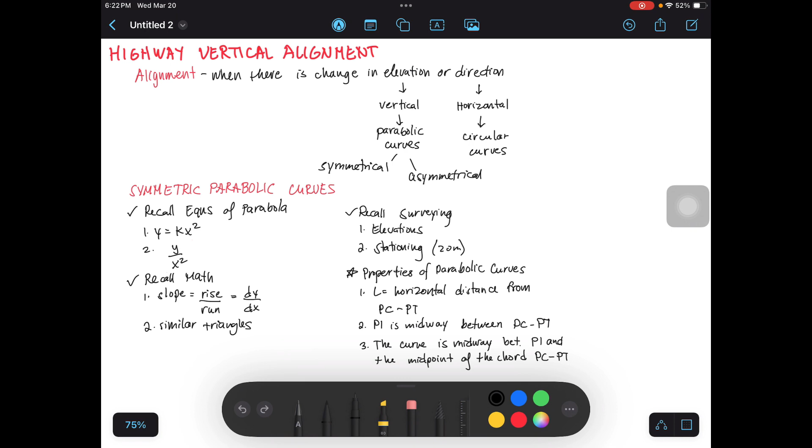So last time we discussed sight distances. When do we use sight distances? When there's an obstruction. So when there's an obstruction, we need to design the highway or roads for safe sight distances so vehicles don't collide, or in case there's an object along the way.

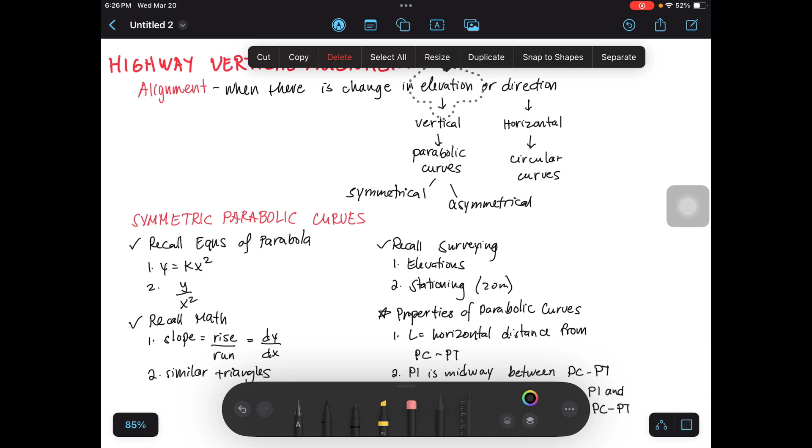Now next in geometric design for highways is alignment. We design alignment in highways when there is a change in elevation or in direction. When elevation changes, it's called vertical alignment. When direction changes, it's called horizontal alignment. So what is vertical alignment? How does a change in elevation happen?

For example, you have a straight road, and then a vehicle. What if it needs to go up and reach the upper part of the road? Then you have a change in elevation, so this needs vertical alignment. For vertical alignment, we use parabolic curves.

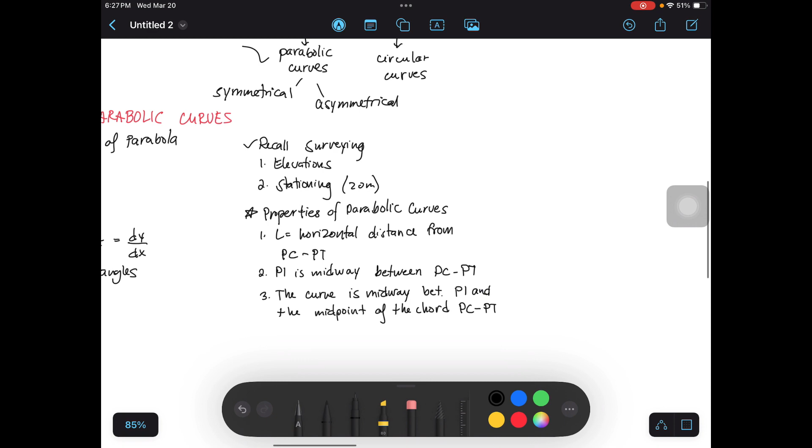For horizontal alignment, we use circular curves. We smoothen the corners using circular curves. This topic, horizontal alignment, was already discussed before in our surveying subject, right? That's where we had simple curves, compound curves, and reversed curves. Those are horizontal alignment, where you have a radius. So that's horizontal alignment, and the curve there is circular.

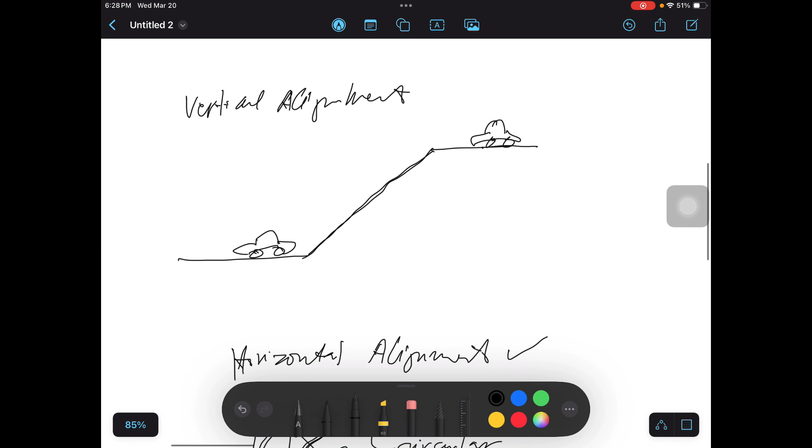So in highway engineering, we will discuss vertical alignment. How do we design vertical alignment? We use parabolic curves. This means these corners here, we smoothen them with the use of a parabola, the parabolic curves. Let's use a red pen to show this, we smoothen them using parabolic curves.

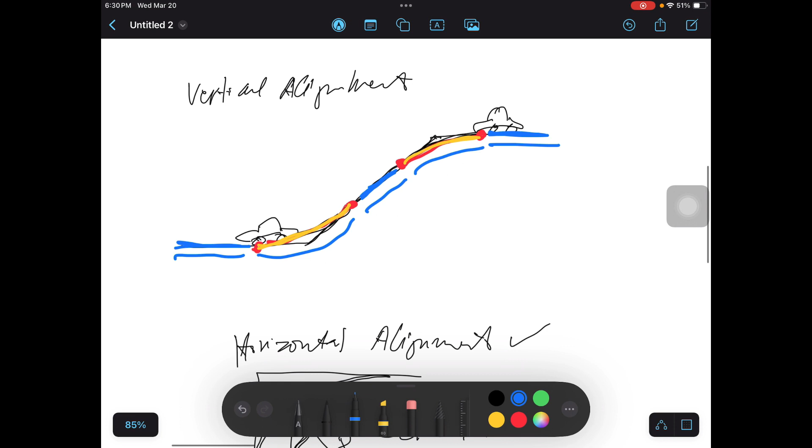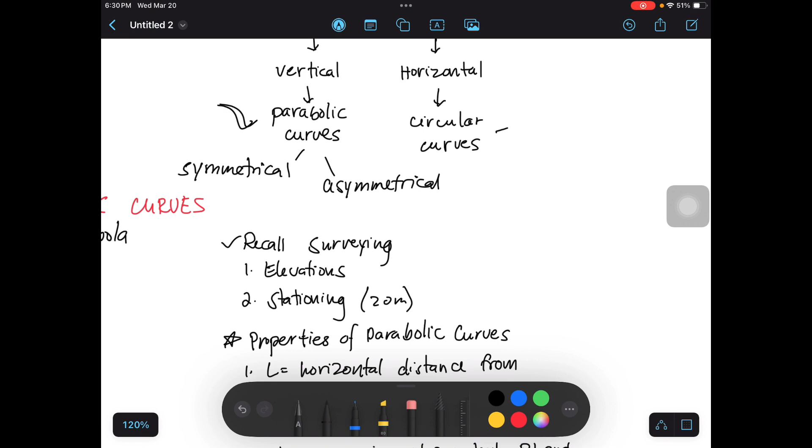So for vertical alignment, we use parabolic curves, and among parabolic curves we have symmetrical curves, and another type called asymmetrical curves. Symmetrical curves are symmetric, while asymmetrical curves are not symmetrical. So let's discuss first the symmetric parabolic curves.

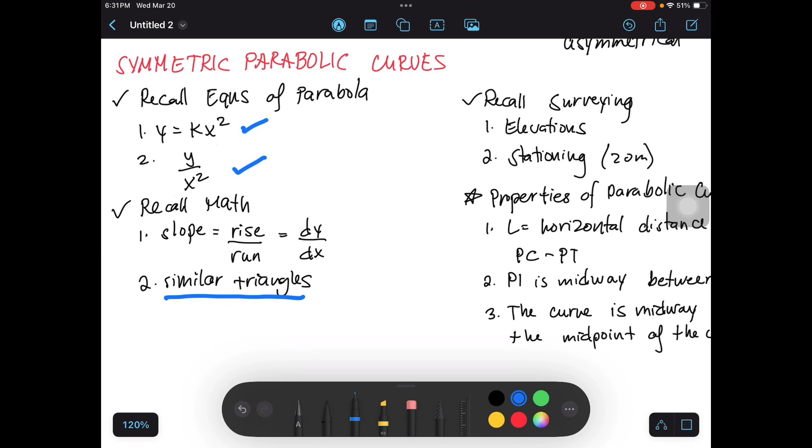So we need to recall our past lessons on parabola equations. Equation 1, this one, and then the relationship of the vertical and horizontal dimensions of the parabola. Recall also that in math, slope is equal to rise over run, and in calculus, slope is defined as dy over dx. And in geometry, we will use the principle of similar triangles. Then in surveying, recall the elevations and stationing. Typically, per station is 20 meters.

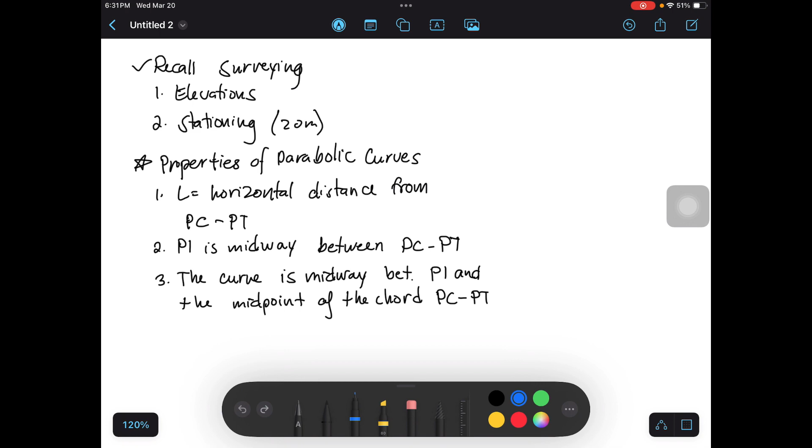So let's have an example of a parabolic curve on a road. At the start, of course, there is a designed terrain. Say the terrain is like this. This is the terrain that you want to smoothen for travel. So we will use a parabola.

We already discussed passing sight distance, when the terrain has a slope, meaning it has a grade. This one is upward, so it is a positive grade. This one is downward, so you have a negative grade. Let's say you have G1 here, and G2 here. G2 is negative because it's downward, G1 is positive because it's upward. This is called the backward tangent, and this is the forward tangent.

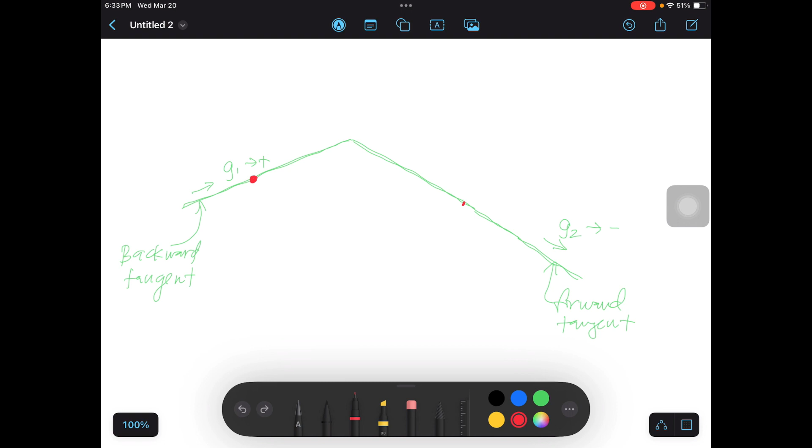Now let's smoothen using a parabola. So let's draw a parabola here. If your parabola starts here, it ends here. So this is your parabola.

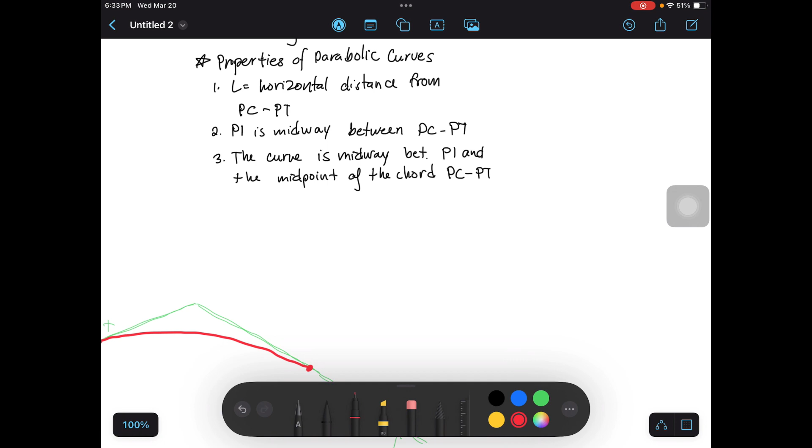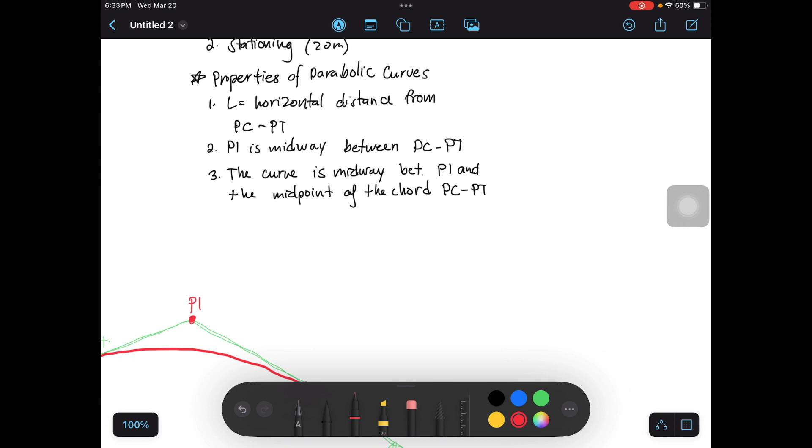Now we can use these properties of parabolic curves to identify the items or parameters involved in solving parabolic curves. Number 1: L is equal to the horizontal distance from PC to PT. So what is PC and PT? These points, PC, wait. So this is PC, and this is PT, start and end. Then there is another intersection here, we call this PI. So property 1, L is equal to the horizontal distance from PC to PT.

So when you dimension the length of the curve, it is a horizontal distance from PC to PT. So this is your L. The length will not align with the actual curve from PC to PT, it won't align like that.

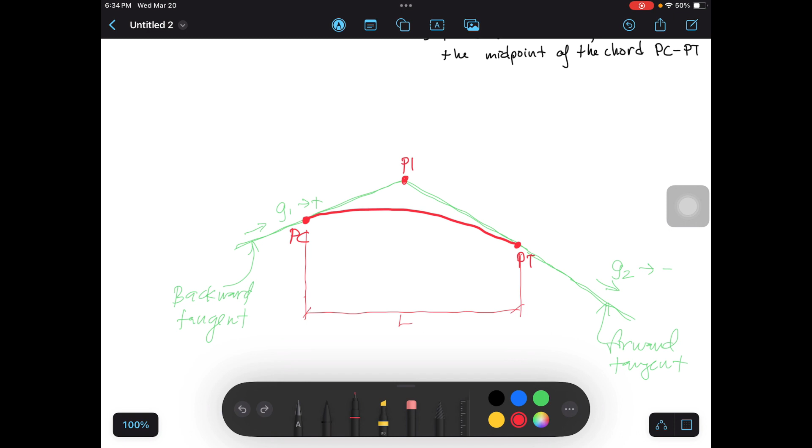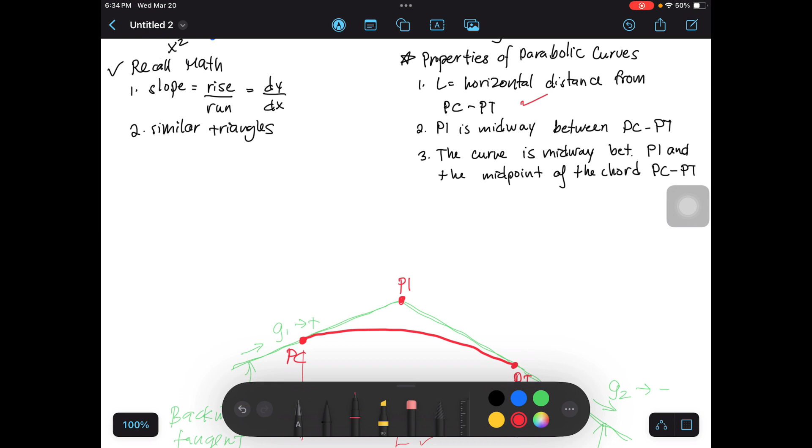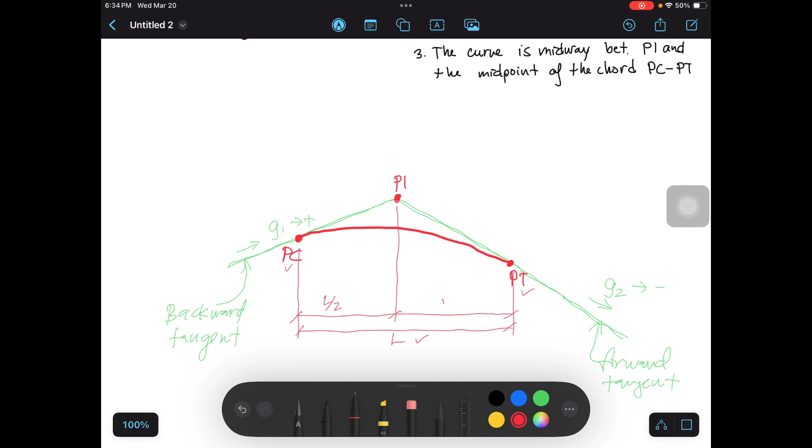The length of the curve is aligned to the horizontal. So property number 2: PI is midway between PC and PT. So this is PC, this is PT. For PI, if you bring it down and dimension it like this, it is midway between the two, meaning this is L over 2, and this is also L over 2. That's the second property.

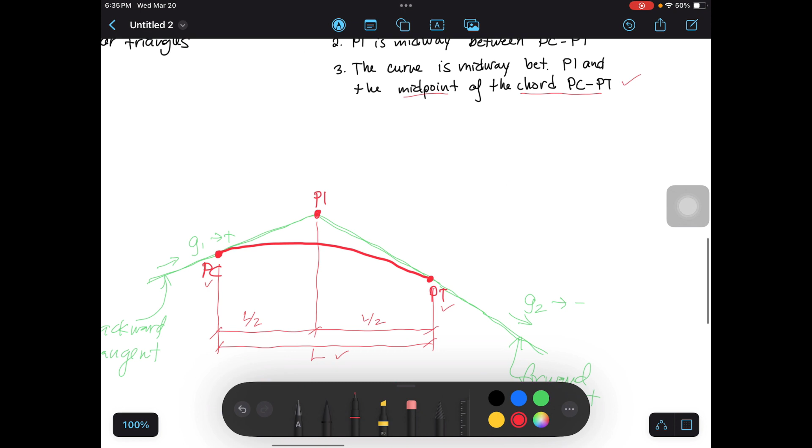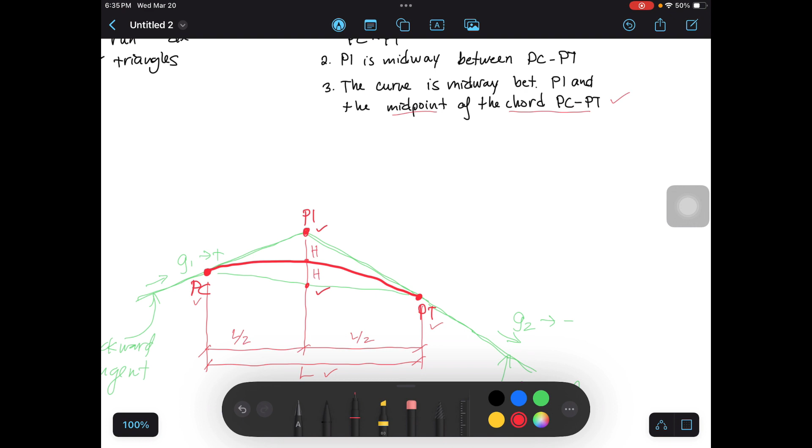Third property: the curve is midway between PI and the midpoint of the chord from PC to PT. So we form a chord from PC to PT. This is the chord, and this is the midpoint of the chord. That midpoint is midway between PI and here. So they're equal, meaning this dimension is equal to this dimension. They are equal.

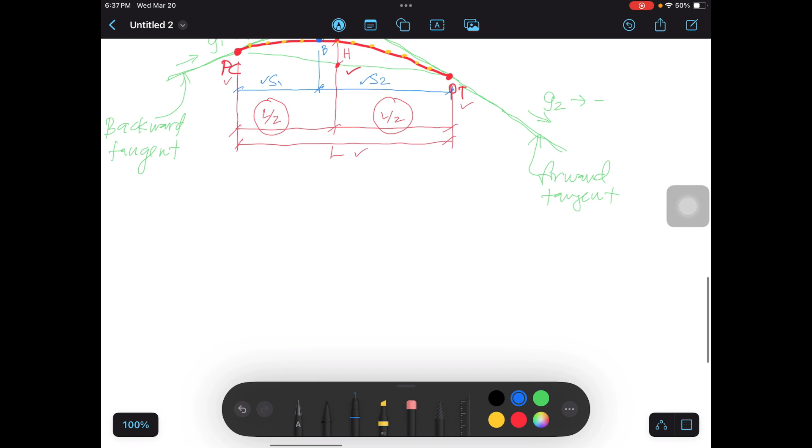If it's horizontally measured from PC, we call it S1. From PT, we call it S2. Now let's try to solve and formulate. Let's make a formula. Let's derive the formula on how to get S1, using our basic math, which is this one, and of course, surveying. So S1, let's first solve for S1.

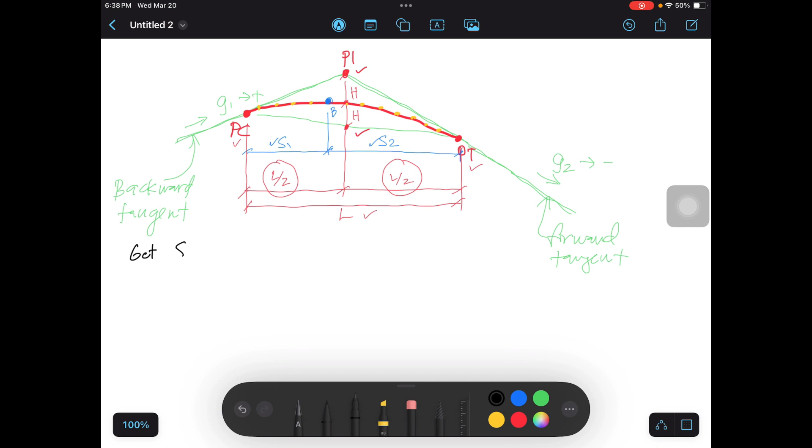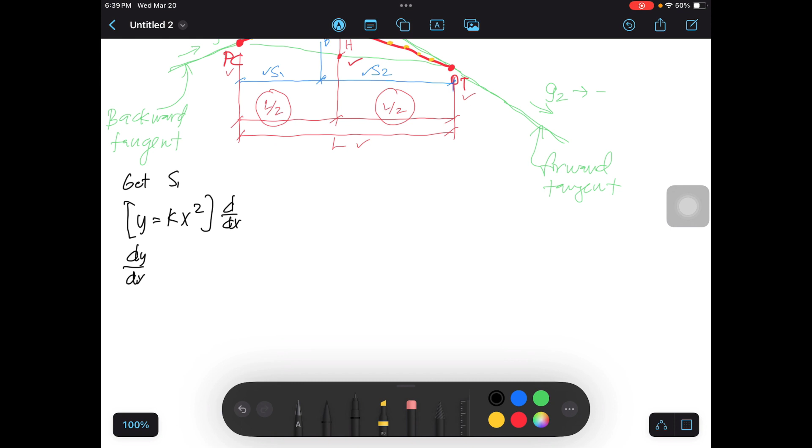Since parabola tayo, let's use yung equation ng parabola, which is y equals kx squared. So kapag dinerive natin to, d over dx, this will be dy over dx equal to k times 2x. Recall, dy over dx is slope, diba, sa calculus, and slope for a parabolic curve is yung grade.

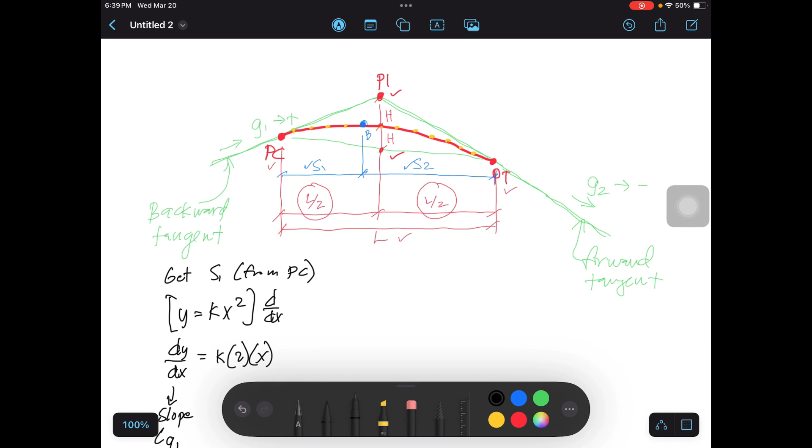Since from PC tayo, S1 is from PC, ang grade na gagamitin is grade 1. Let's substitute. G1 is equal to 2kx. And then, what is x? Siya yung horizontal distance ng highest point to PC, which is S1. So let's substitute siya dito, note this as S1 na. Ayan, meron na tayong equation with the relationship ng G1 and S1.

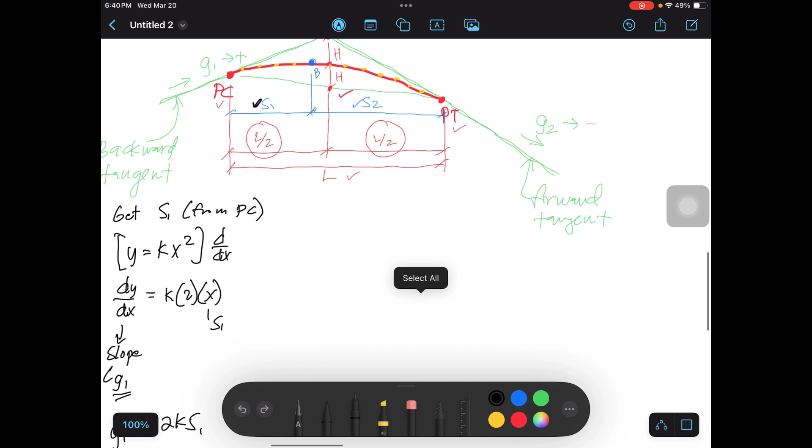Kaso, ano yung K? Wala naman tayong K. So let's derive an equation to get K. Let's use yung S2, let's get yung S2.

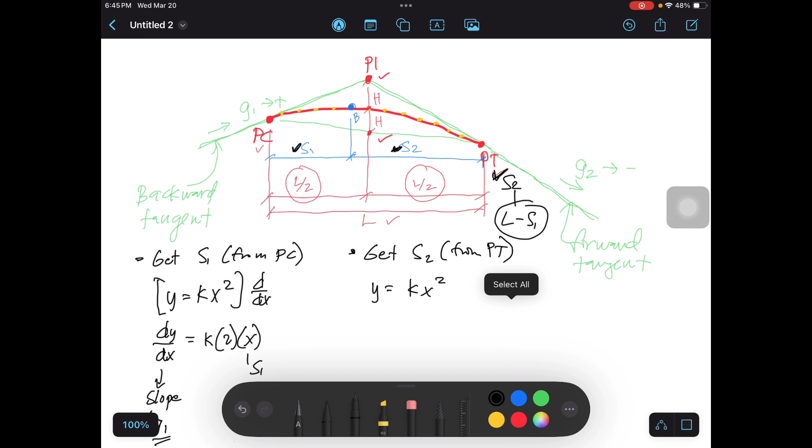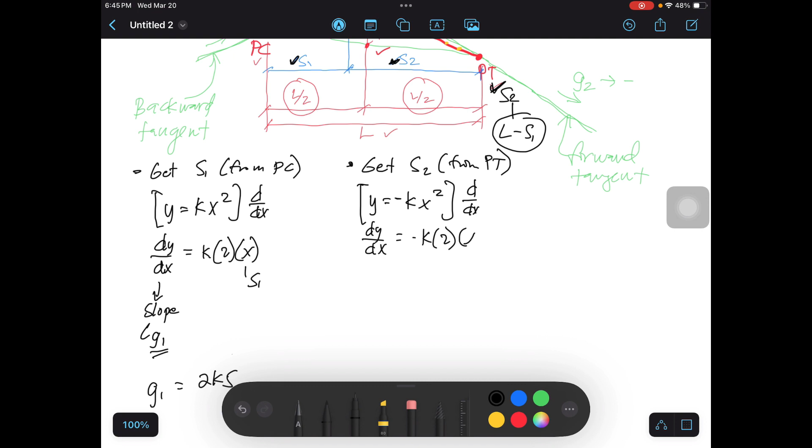Yung equation ng parabola ulit, kx squared. Pero since nandito tayo sa side ng S2 or side ng PT, negative tayo dyan since downward ang grade natin. Let's derive d over dx. So meron tayong dy over dx equals negative k2x. Remember again, this is a slope. Since nasa side tayo ng PT, ang grade doon is G2. So let's write, this will be G2 then. And sa right side ng equation, ay ito pa ng x.

Ano ang x natin sa side ng PT? It is S2, this is S2. So let's write yung second equation natin. This will be G2 equals negative 2K S2. So meron na tayong equation, another equation.

So we are doing this para makancel yung K. Let's find a way to cancel K. What we can do is divide natin yung dalawang equations. Cancel yung K. Divide mo sila, cancel itong dalawa. Ang natitira is G1 over G2 equals negative S1 over S2. So G1, G2 are given.

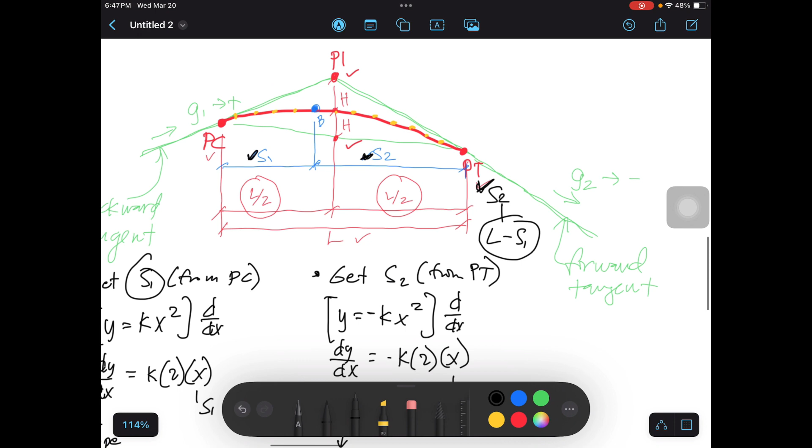S1 is, may nakuha na tayong S1. Pero as you can see, dalawa yung variable natin, S1 and S2. So since we're deriving, muna let's express S2 in terms of anong pwede nating gawing equation for S2. Diba kapag yung length, may minus natin ng S1, this will be S2.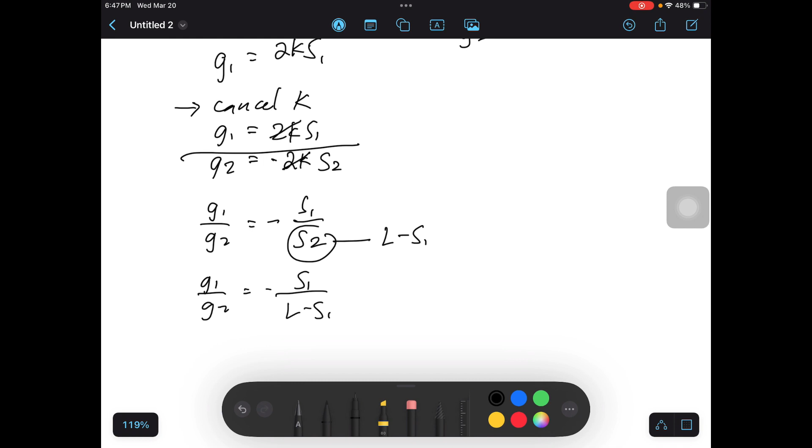So let's substitute this value. Instead of S2, let's use L minus S1. So our equation will be negative S1 over L minus S1. Isa na lang yung variable natin sa equation, it's S1 na lang. And this one, we need to isolate para ma-form natin yung equation for S1 lang. So what we can do, cross multiplication, G1 times L minus S1 equals, dito yung negative, and then S1.

Okay, distribute natin to. G1 L minus G1 S1 equals negative G2 S1. Isolate natin si S1, ilipat natin doon. So this will be positive na. So G1 S1 minus G2 S1 equals G1 L. Isolate na natin yung S1 na to. Bring out natin, so G1 minus G2 equals G1 L.

So ma-isolate na natin ang S1 by dividing both sides, so G1 minus G2. Cancel to, we got our equation for S1.

At let's get yung equation for S2. Pwede na lang natin gamitin yung mga equation na to at equation na to. So let's manipulate equation 2 para i-isolate si K, para yung K na yun, isi-substitute natin sa K na to. Let's do that from equation 2, we will get yung value ng K. Let's isolate K, nagiging siyang ganyan.

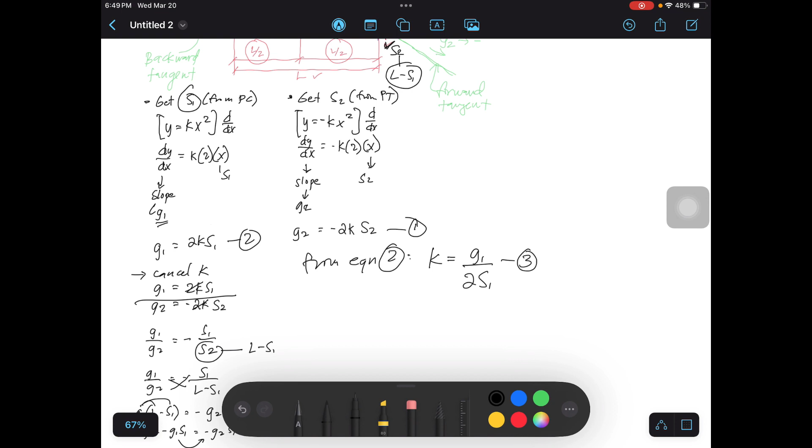So let's call din equation 3. Ilipat natin yan sa equation 1, put equation 3 in equation 1. So equation 1 is G2 equals negative 2. Then ano yung K? Gagawin na natin siyang equal sa equation 3 na 2S1, S2, KS2.

So ito na yung equation natin, but dalawa yung variables. Since this is to get S2, yung S1 ang express natin in terms of S2 by using L minus S2 is S1. Let's substitute that, negative. Pwede na natin i-cancel pala itong 2, ay sorry, alisin na natin ito dito. So the answer is negative G1 over L minus S2 times S2.

Hindi naman pwedeng i-ganyan yan dahil quantity ito, hindi mo yan maka-cancel. So what we can do with this, cross multiplication again. So G2 times L minus S2 equals negative G1 S2. Distribute, G2 L minus G2 S2 equals negative G1 S2. So put together yung similar, or put together yung S2.

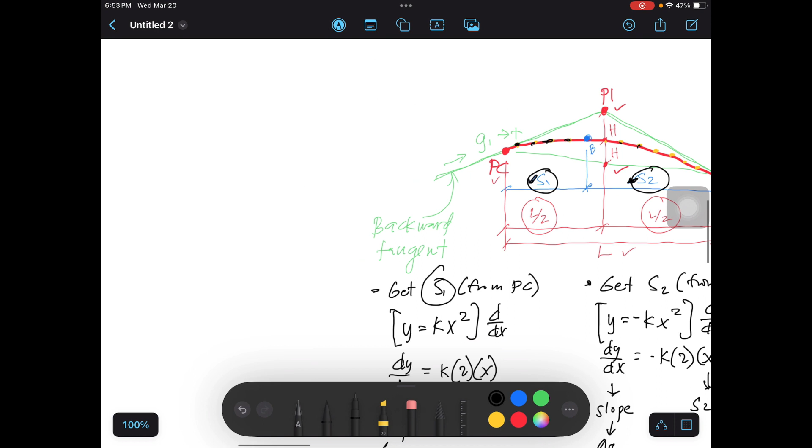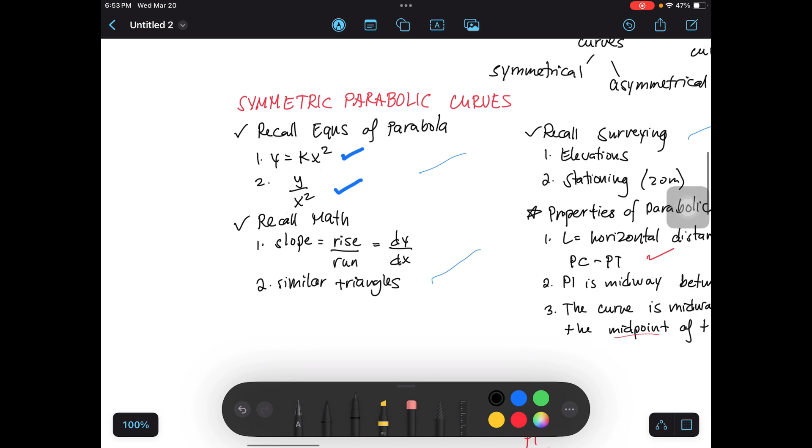So, we can use this relationship, the equation says that the vertical dimension from the point being observed up to the tangent is y. This is y. And the horizontal distance of y from the reference point is x. So when you relate them, their proportion is y over x squared.

So you can use this proportion for other points of the curve. For example, take h. The proportion applies to h too. So h over L over 2, squared.

Why is it like that? Because for a point along the curve, this is its y, and this is its x. For h, the midpoint of the curve is here, up to the tangent is h. The horizontal distance from the reference PC is L over 2. That's why this is y, and this is the corresponding x squared for h. I hope you understood that.

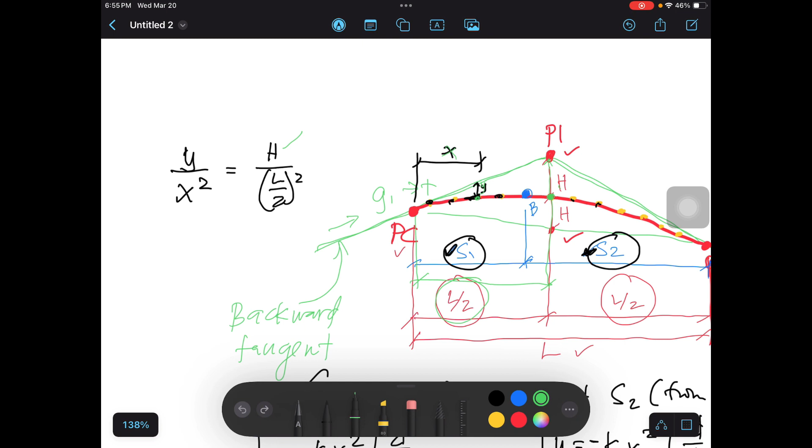So using this equation, we will be able to get the position of all points along the curve. So let's say you have another point you're evaluating. Let's call it point 2. Let's say it's here. Here is point 2 that we observe.

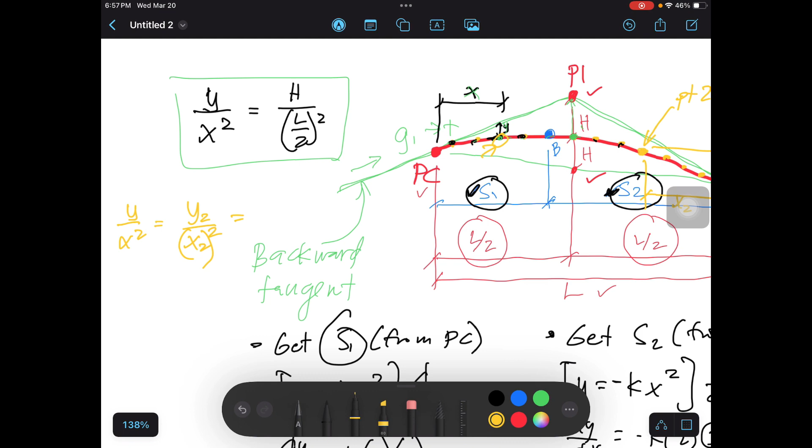It will be y over x squared equals y2 over x2 squared. And that is also equal in proportion to h over L over 2 squared.

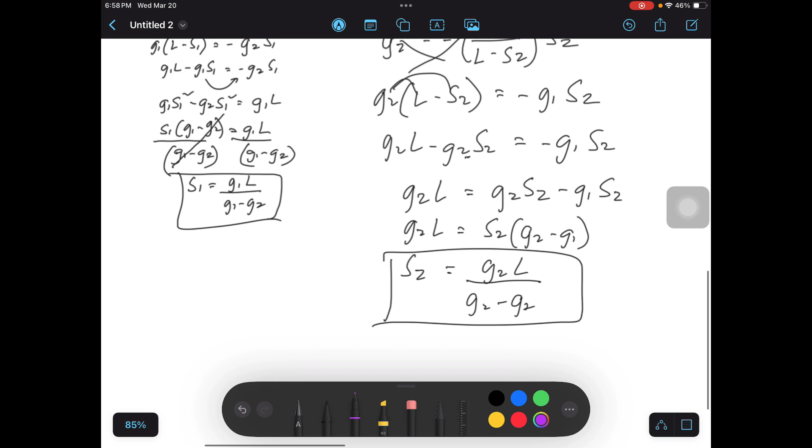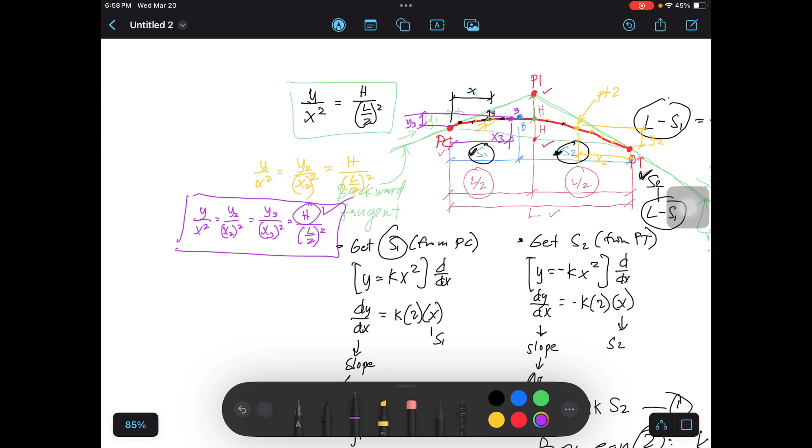So, they just repeat. We've now completed all the equations we need for solving a parabolic curve. We have the formula for S1, S2, and we have a formula for H - oh wait, we don't have H yet. We got the one for X and Y, but we don't have H yet. So we need to derive a formula to define H.

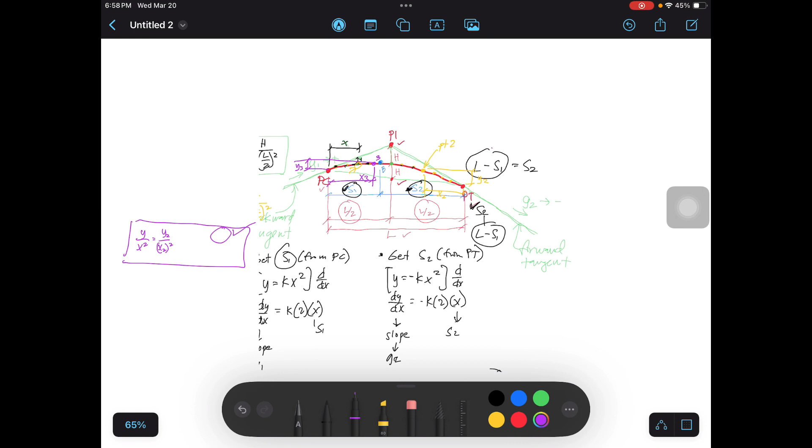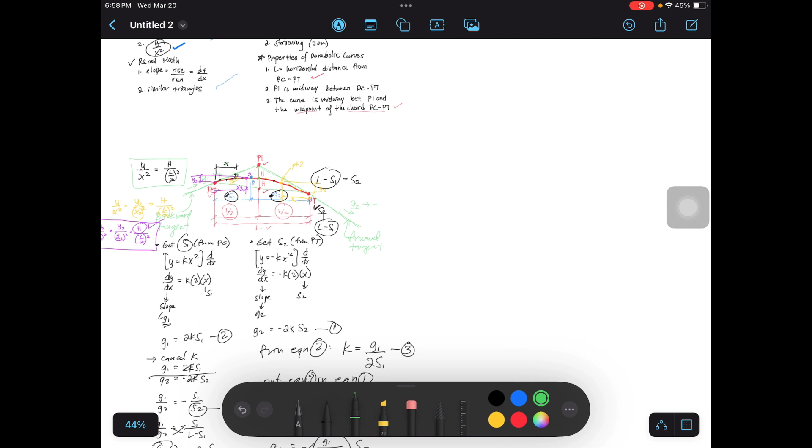Our diagram has gotten a bit messy, so let's try drawing another curve. Let's draw it again here. We will smoothen this using a parabolic curve, starting here, going like this.

Okay, this is like a review. What are the points? Set up the points. We have 3 points: PC, PT, PI. First property of parabolic curves: horizontal distance from PC to PT is L, and from PI the distance to PC and PT sides are equal. Third property is that the midpoint of the chord from PC to PT forms equal dimensions here. So you have H there, equal to H here.

Now we're trying to get the value or formula for H. So let's add the other labels too. This one is G1, this is G2, this is again the back tangent, this is your forward tangent.

What else should we label? We can use that for the fill-in-the-blanks quiz on the parts of the parabolic curve. What else haven't we labeled? I think we've put in everything. So let's put in S1 now.

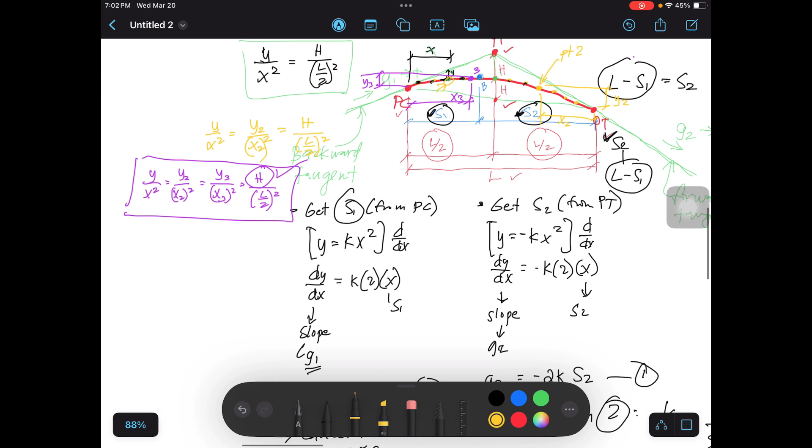What's the property when triangles are similar? They're proportional, similar to the parabolic curve - the x and y in the parabola, y is to x squared. Here it's similar, but the denominator isn't squared.

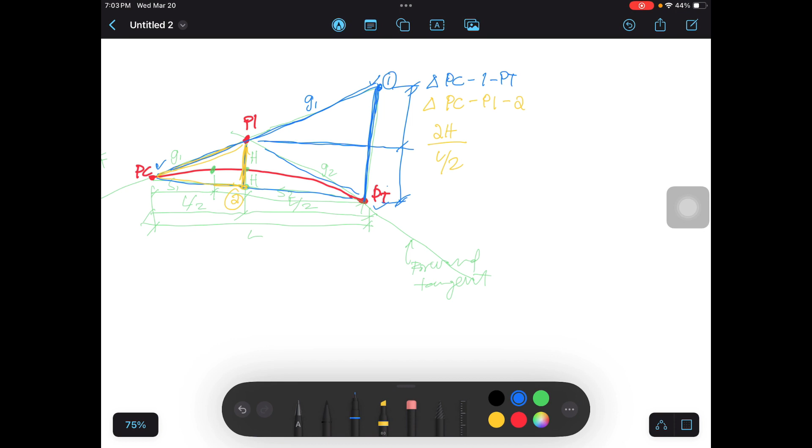So let's use rise over run. This is a continuation for grade G1, and this is still for G2. We can get this by rise over run. This is your rise, this is your run. G1 is equal to rise over run.

So what is your rise? This is the x we're looking for. And what is the run? It's L over 2. So let's get x.

This is our x. And then for the bottom part, to get that, it's G2 now. G2 is equal to rise over run. But remember, G2 is negative.

And what is the rise? That's what we're solving for, let's call it x. So its run is L over 2 as well. So the x for that is negative G2, times L over 2. So let's put G2, negative G2, L over 2.

So if you combine that, it will be the complete height to complete our similar triangles. So what is the equation for similar triangles of the big triangle?

So height is L over 2, G1, G2, and then what is the denominator? It will be the total length L.

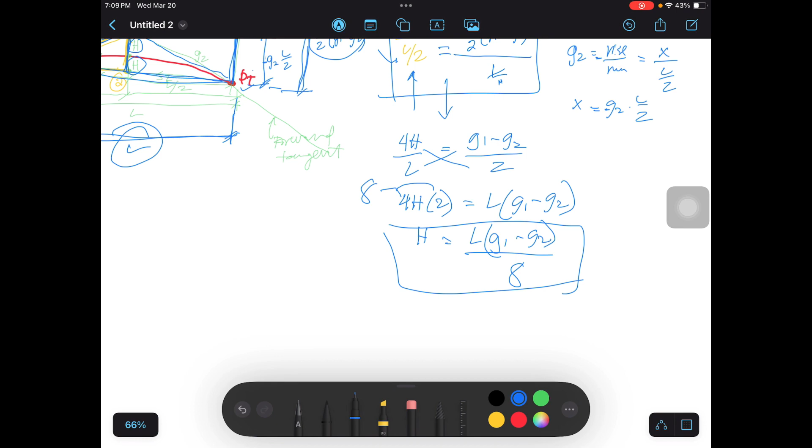So let's have a problem now. Example number 1: a symmetrical parabolic curve. A symmetrical vertical summit curve. So it's given that our curve is symmetrical, and it's vertical, a summit curve.

So number 1: compute the length of the curve. Compute the distance of the highest point of the curve from PC. Compute the elevation of the highest point of the curve.

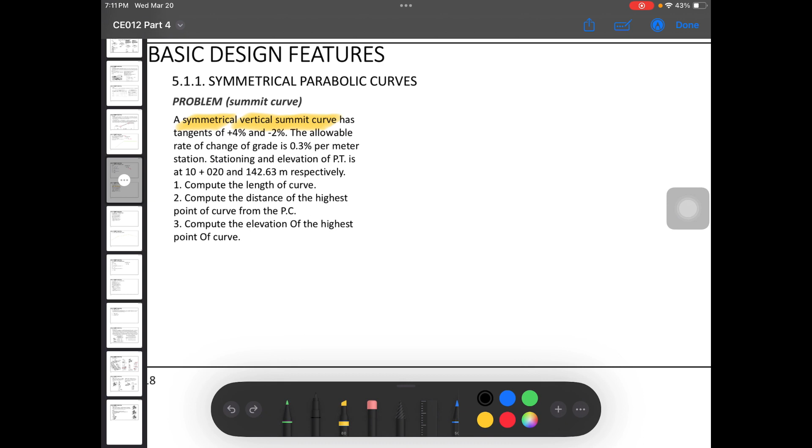So let's identify the given. Number 1, let's get the length of the curve. So how do we get the length of the curve? From the formulas we derived, there's no length of curve formula there.

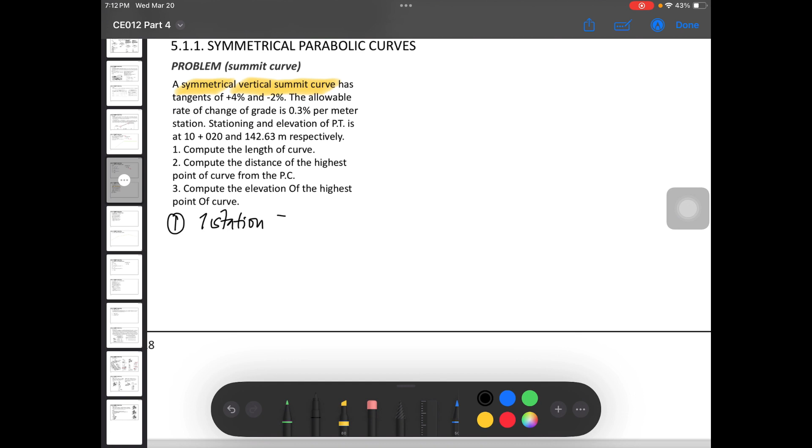But we're given that there's a change of grade of 0.3% per meter station. We stated earlier that per station is equivalent to 20 meters. So every 20 meters, we have a change of grade of 0.3%. So we can put that into an equation: R is equal to G1 minus G2 over N.

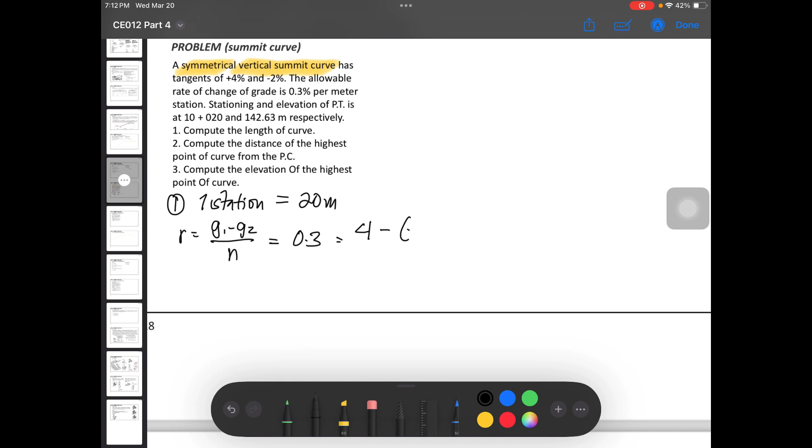So R is the rate of change of grade, and N is the equivalent number of stations. So let's substitute. R is 0.3%, and the grade for G1 is 4%, minus G2 which is negative 2%, all over the number of stations. So we can get the number of stations from this equation.

So performing the operation, we can get N equal to 20 stations. So if we have 20 stations, and each station is 20 meters, the total length of our curve becomes 20 stations times 20 meters. So we get a length of 400 meters. That answers number 1.

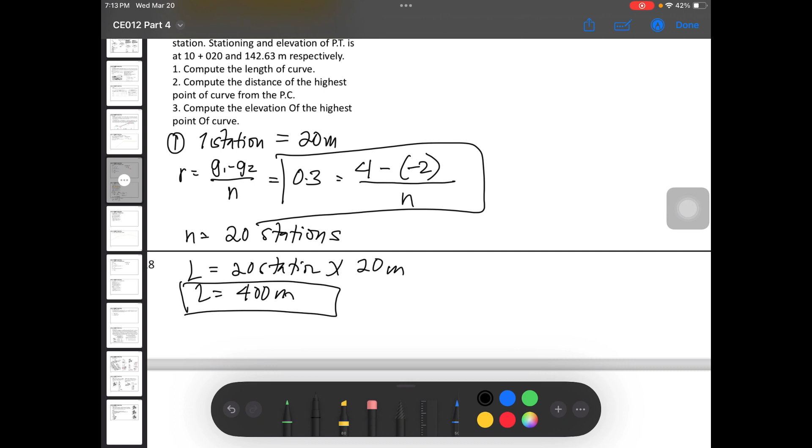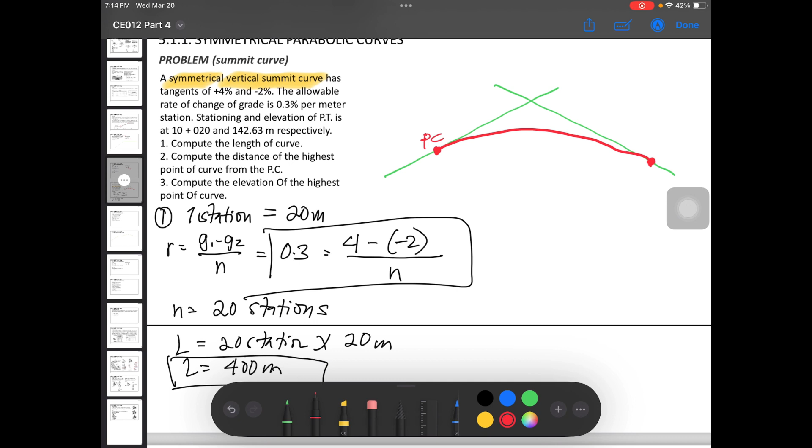Number 2: compute the distance of the highest point of curve from PC. So we need to draw the curve here. Let's start with the back tangent and forward tangent, then label the points: this is PC, PI, and PT.

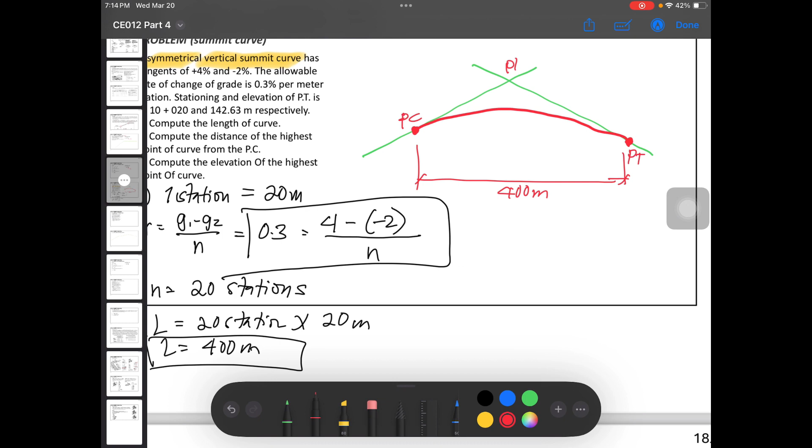And then we got the length of the curve, which is 400 meters. The given station of PT is 10 plus 020, and the given elevation is 142.63 meters. So that's for point PT.

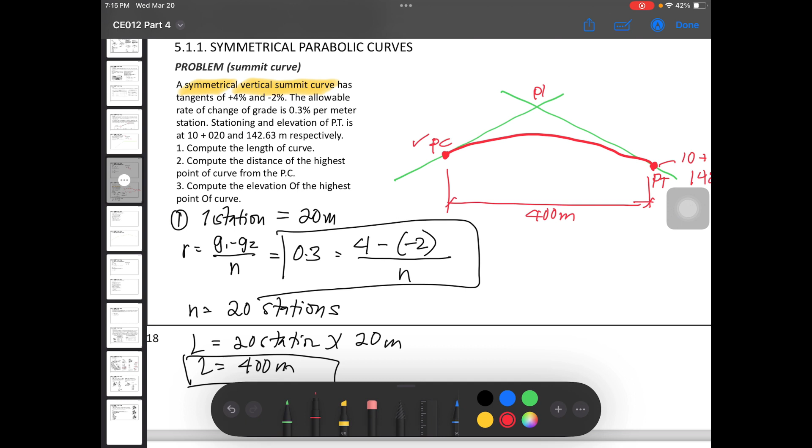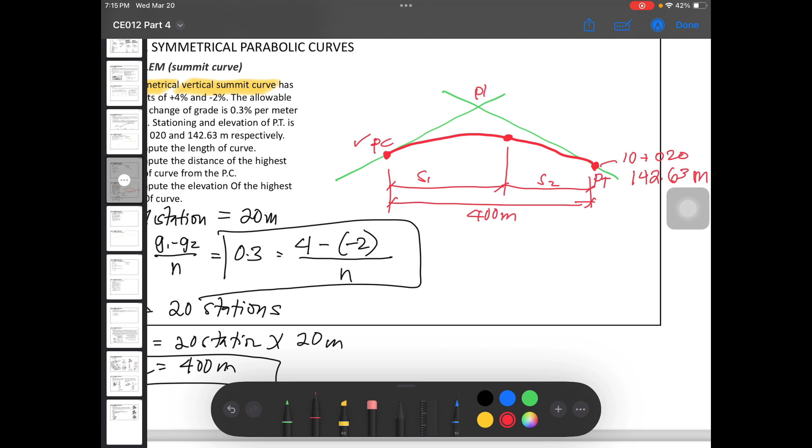Now we'll look for the distance of the highest point of curve from PC. So starting from PC, what is the distance if we go from PC? That will be S1. So let's say here is the summit or the highest point, this is S1, and then this will be S2. Then we have a grade of 4% here, and 2% here on the side of PT. So what is our equation to get S1?

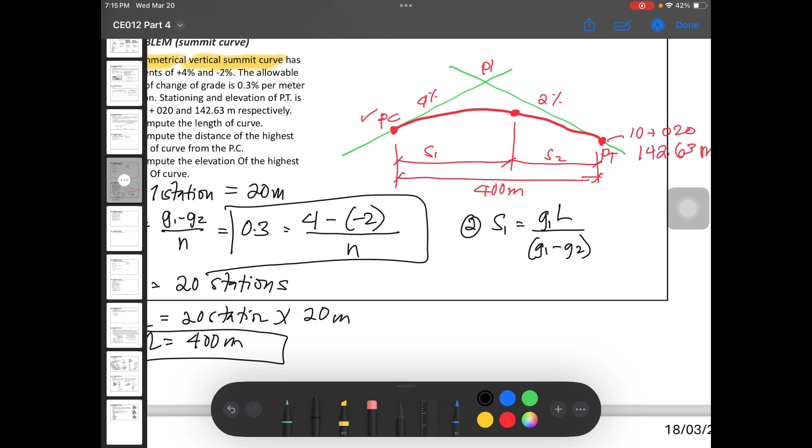G1 times L over quantity G1 minus G2. So substitute, G1 is... so kanina sa number 1, hindi natin kinonvert yung mga percentage values. Ginamit natin sila direkta dito.

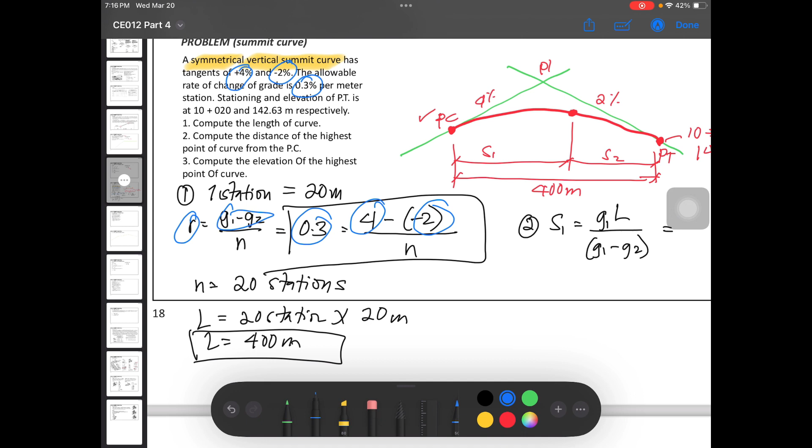Kasi walang unit ang number of stations. Pero dito sa number 2, sa formula may kasama silang linear unit, which is yung length, in meters. Itong S also in meters. So kapag ganon, we need to convert yung mga grades into decimal value nila.

So G1 will be 0.04, L is 400 meters, G1 is 0.04 minus G2 na negative 0.02. So doing the operation, S1 is equal to 266.67 meters from PC.

So ito yung S1, 266.67 meters. So evaluate your answer. S1 is 266.67, ibig sabihin lampas siya dun sa kalahati ng length. So ibig sabihin tama yung assumption natin na lampas siya sa PI, dahil dito yung half ng length, ito yung L over 2.

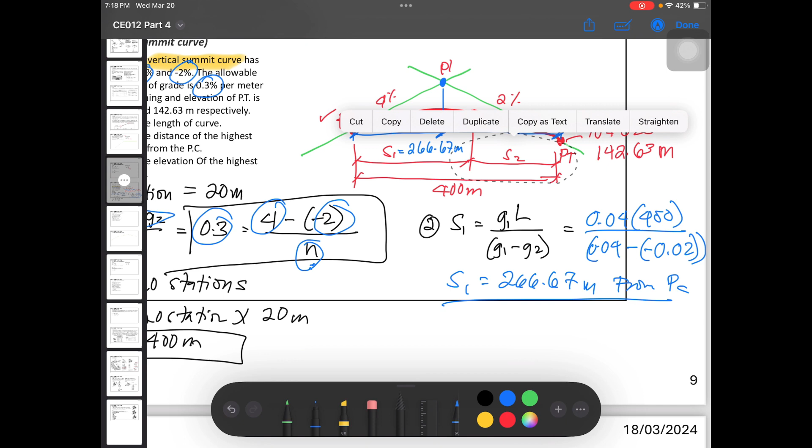Ayun. Saglit. Ay. Saglit, ba tayo lumipat?

So, anong magiging value ng S2? It's 400 minus 266.7. So, that is equal to 133.33 meters.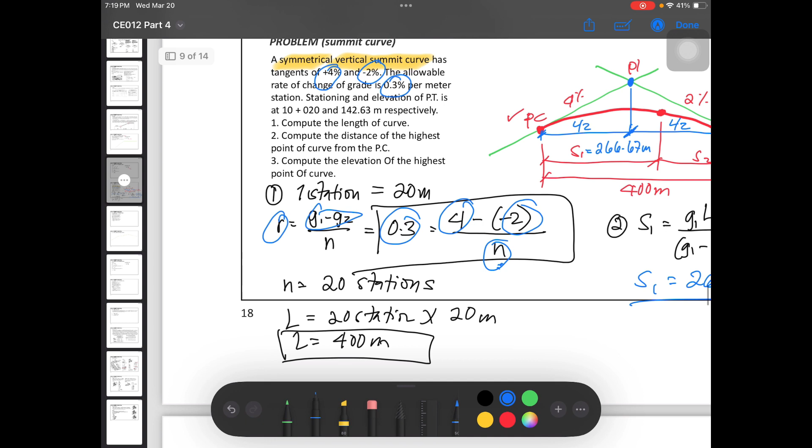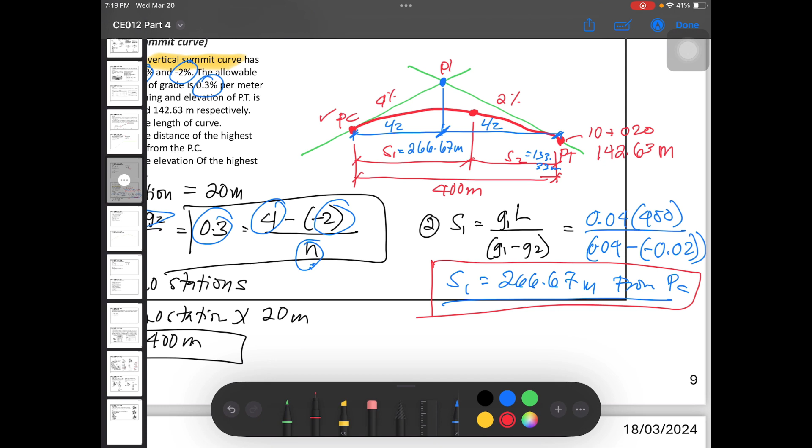Ano nga bang kinukuha natin sa number 2? We're computing for the distance of the highest point of curve from PC. So, that is S1. So, we've answered na pala number 2. So, the distance ng highest point from PC is 266.67 meters.

So, number 3, yung elevation ng highest point of curve. Ano ang need nating dimension para makuha yung highest point ng curve? Since we are given yung elevation ng point PT,

ito siya. This is 142.63 meters. So, we can use yung rise over run. Slope is equal to rise over run. Makukuha natin itong height na to.

Height over run ng grade -2, grade ng forward tangent versus yung S2. So, makukuha mo yung height na to. And then, pag nakuha mo yung height na yan, you need to minus some portion na to. Itong portion na to, kailangan mong i-minus. Yun yung magiging elevation ng highest point ng curve natin.

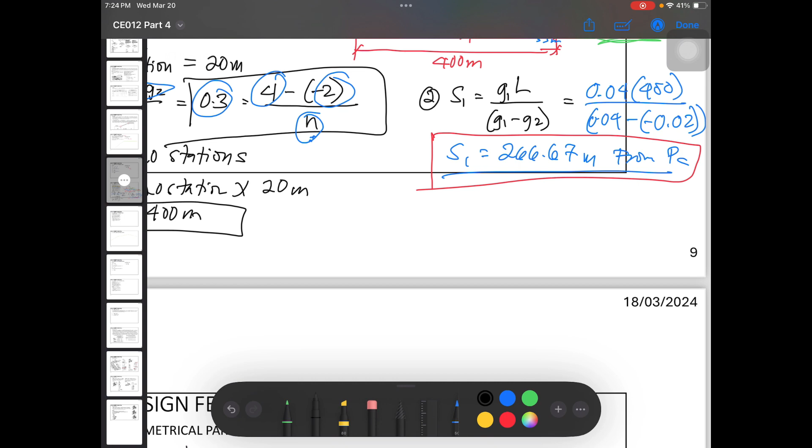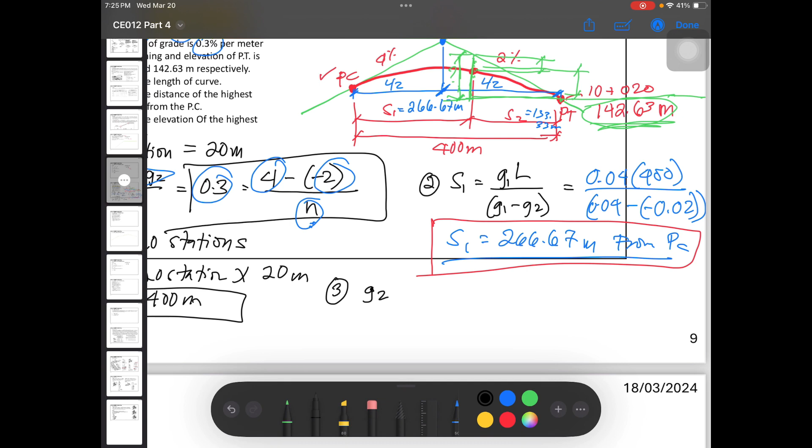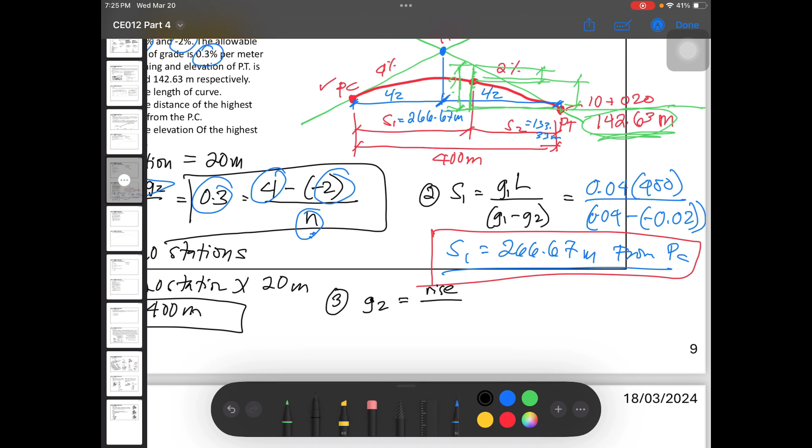So, to get that, gagawin nga natin yung slope, rise over run. So, slope G2, since nasa right side tayo, side ng PT. So, G2 is equal to rise over run. Ano yung rise niya? Actually, yun yung hinahanap natin, so let's just write rise over run. Ano yung magiging run natin sa triangle na to? It is S2, where S2 is equal to 133.33 meters. So, G2 is 0.02.

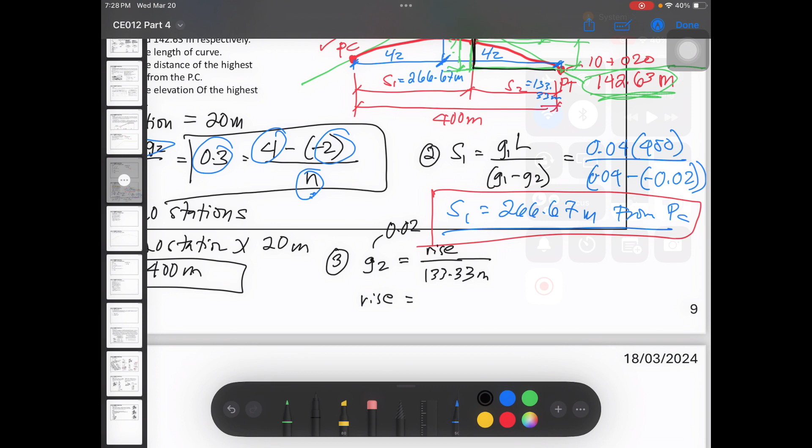Converted into decimal kasi nga may linear unit tayo. So, makukuha natin yung value ng rise. So, our rise is equal to 2.667 meters.

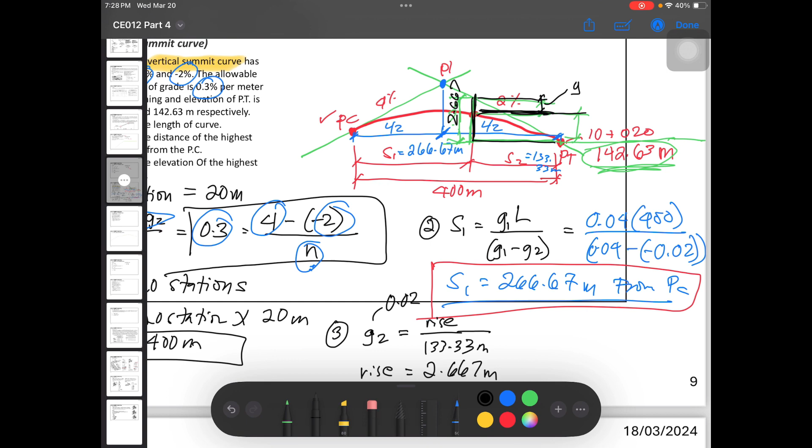Next, kailangan natin kunin, ito na yung rise natin, let's put 2.667. So, next natin kukunin is this dimension. This is y, diba? Para yan ang i-minus natin, makukuha yung elevation. So, paano natin kinukuha yung y? Yung squared property nga ng parabola.

So, y is x squared. Paano na natin siya ipoproportion? Siyempre, dun sa h, gaya kanina. So, h is L over 2 squared. Pero, wala pa tayong value ng h. So, formula for h is L over 8 times G1 minus G2.

So, substitute. L is 400 divided by 8. G1 is 0.04 minus G2 is negative 0.02. So, H is equal to 3 meters. So, nasa si H.

Isa-substitute natin si H dito sa formula. So, meron tayong L, meron na 400. Meron tayong X. Ang gagamitin natin X is, since nasa side tayo ng PT, we will use S2 na X. This is S2 na equal to 133.33 meters. So, given na lahat ng values, makukuha na natin si Y.

So, pwede na natin i-shift solve yan. Ang makukuhang Y value is 1.33 meters. Now, makukuha na natin yung elevation ng summit or yung highest point ng curve.

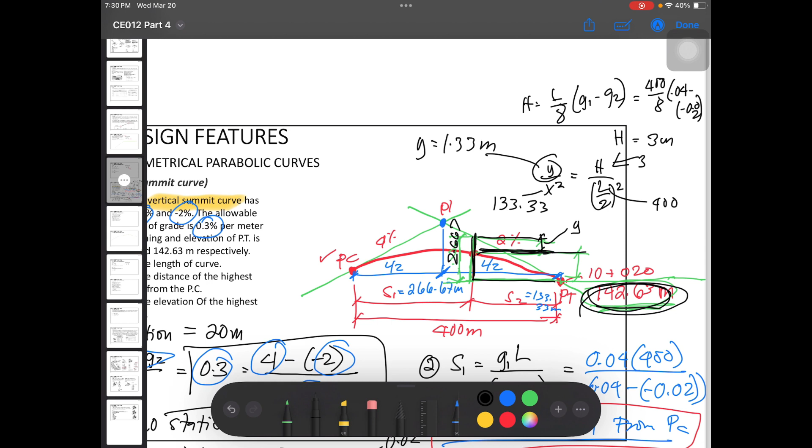So, from the elevation of PT, i-add muna natin itong height na 2.667 meters. At ima-minus natin itong maliit na Y, para makarating tayo dun sa summit point. Minus, ilan ba yung Y? 1.33 minus 1.33 meters. So, all in all, elevation is 143.97 meters.